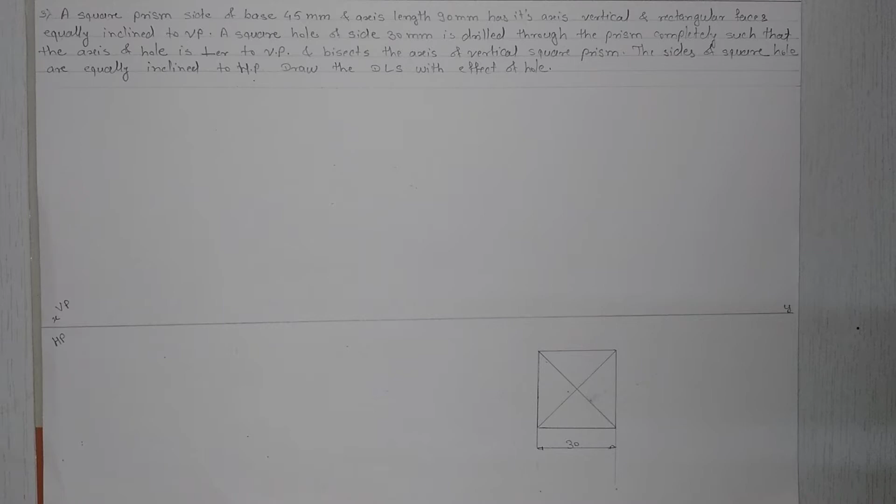Hello student, in our video lecture series of mechanical working drawing, we take the fifth problem. First we read the problem carefully.

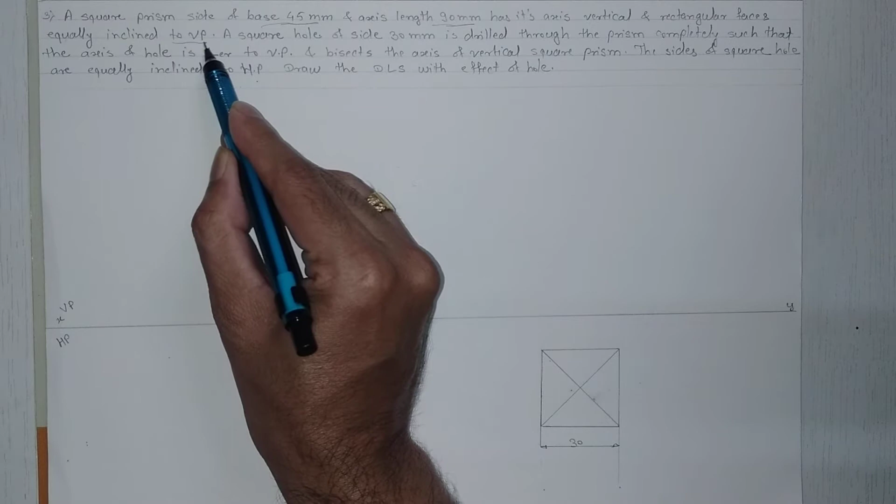A square prism, side of base 45 mm and axis length 90 mm, has its axis vertical and rectangular faces equally inclined to VP. Means rectangular faces are equally inclined to VP. Okay, means our square will be below the XY line, on HP.

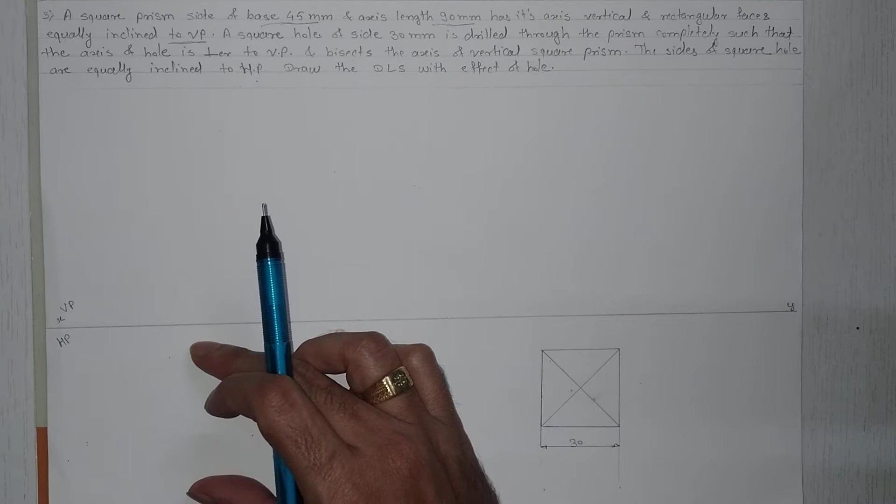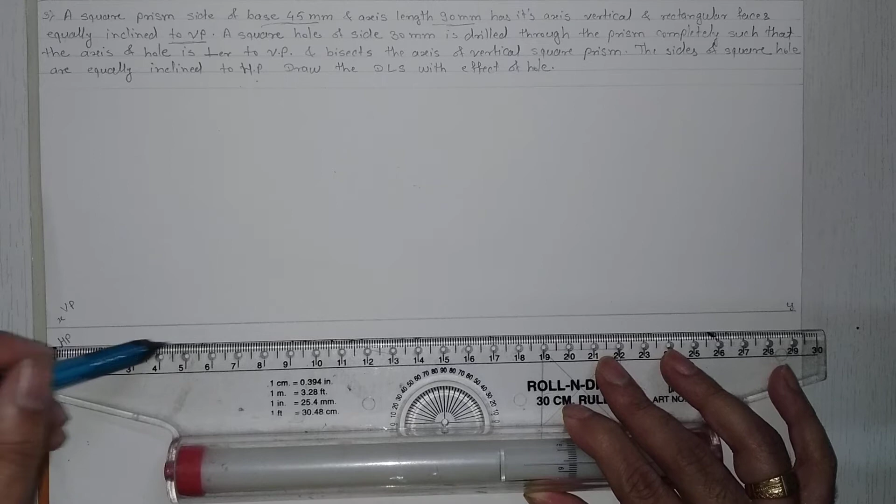Okay, first we draw the square below the XY line. First take a small horizontal line which will be parallel to the XY line. On that line we take an angle of 45 degrees in both directions. Sorry, this is 45. Then draw the angle.

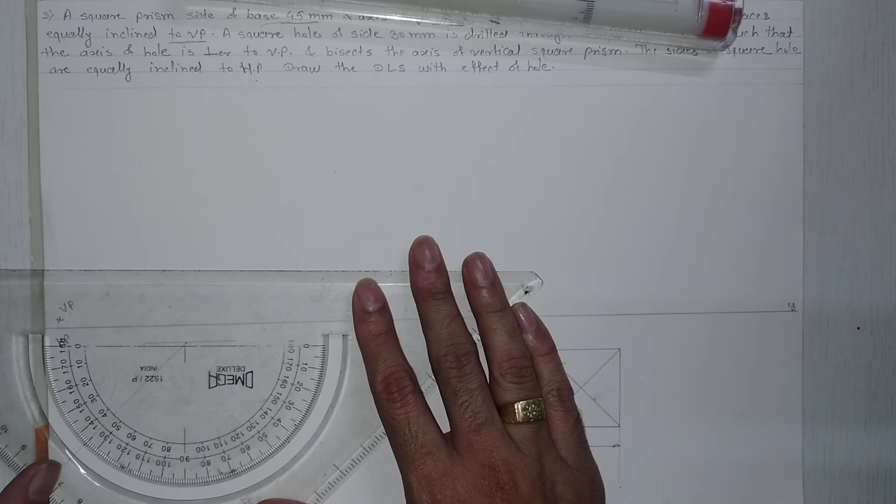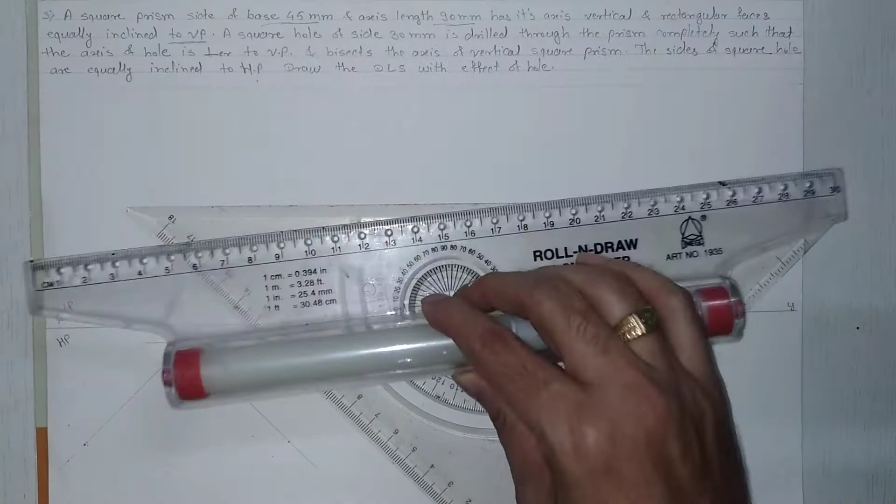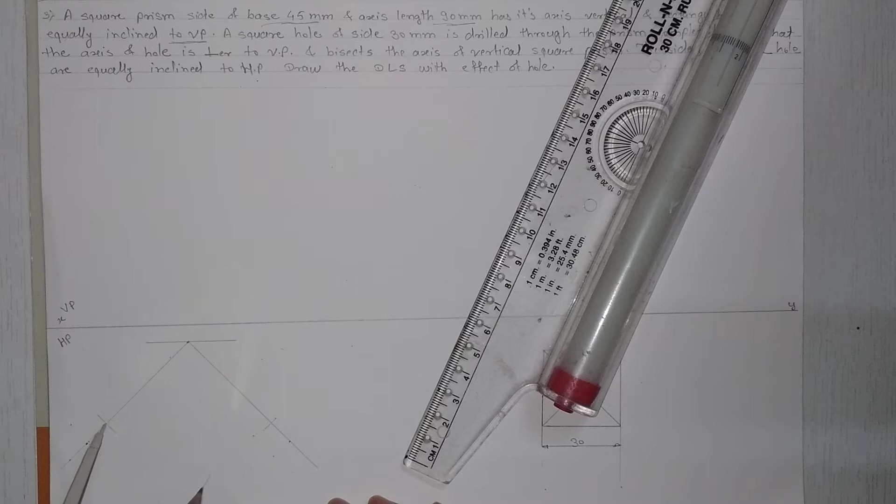Square prism, side of base 45. In the compass we take a distance of 45. This is the distance of 45 mm. After that, from this point we draw one arc on the 45 degree angle and the next arc on the other 45 degree angle. From that point we add two arcs and mark the point. Okay, here is our square, side of base 45 mm.

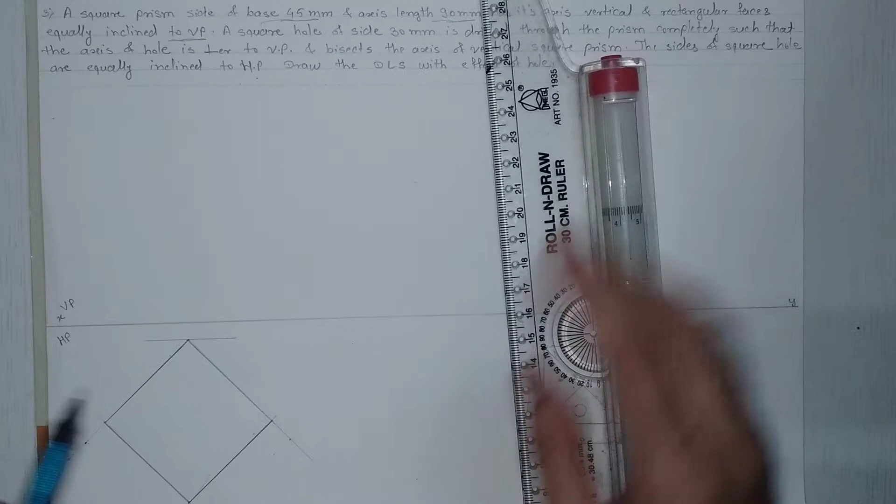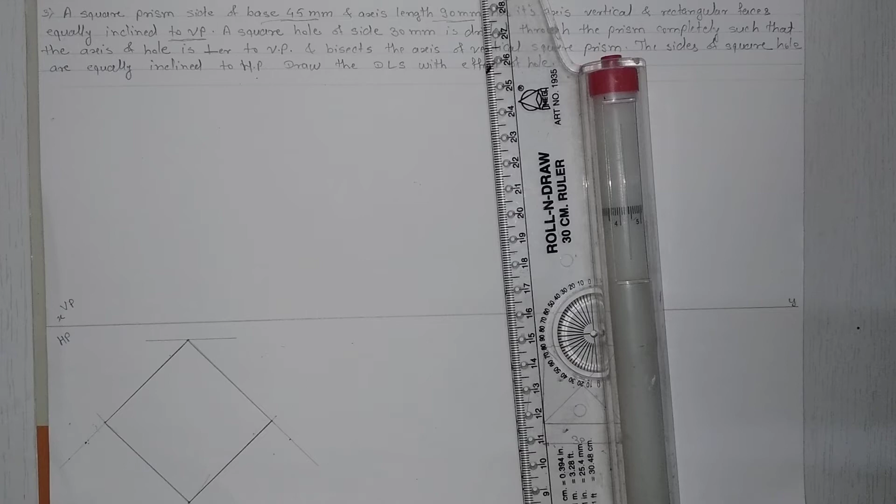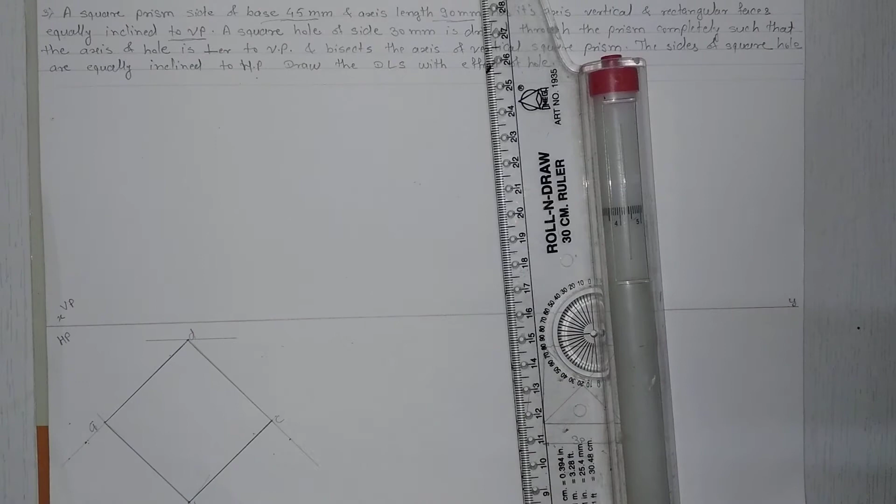Okay, we give the naming A, B, C and D. Take a vertical distance from this point for axis height; this is our vertical distance. The axis length is 90 mm. From this point we draw the line or mark the point at 90 mm.

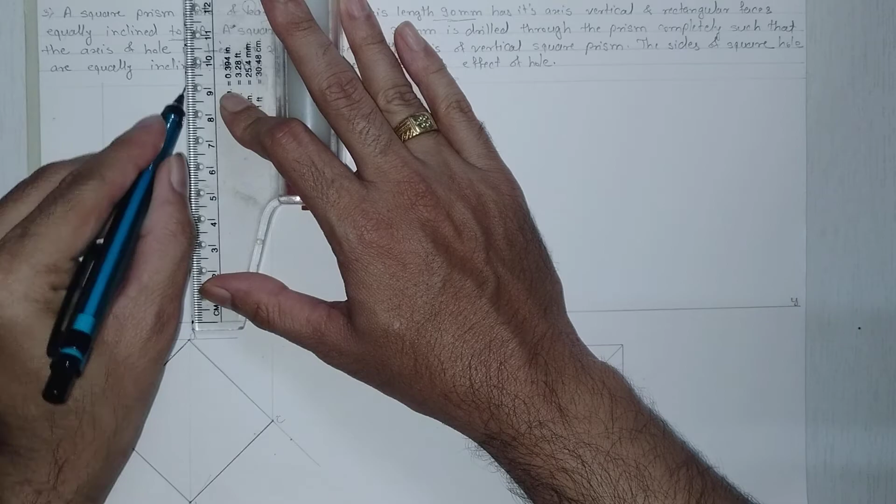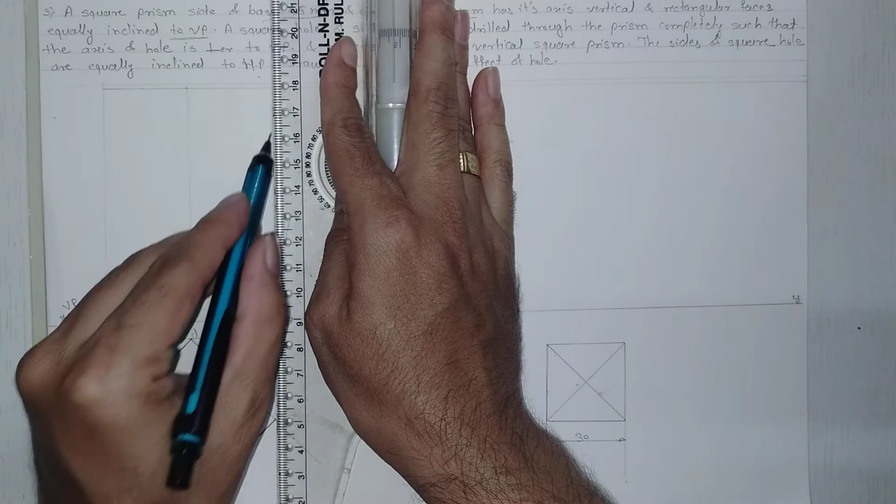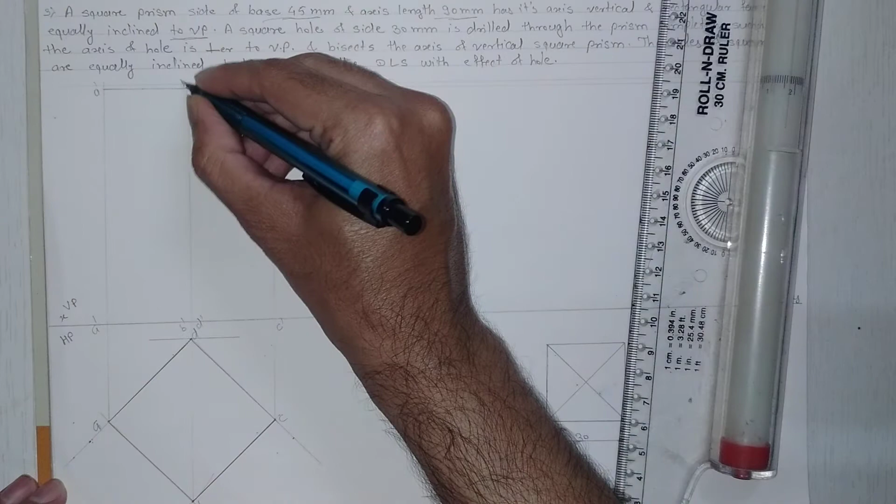Again, parallel to the XY line we draw a line at 90 mm axis length. Okay, A dash, B dash, C dash, D dash. Again here is A dash, B dash, D dash and C dash.

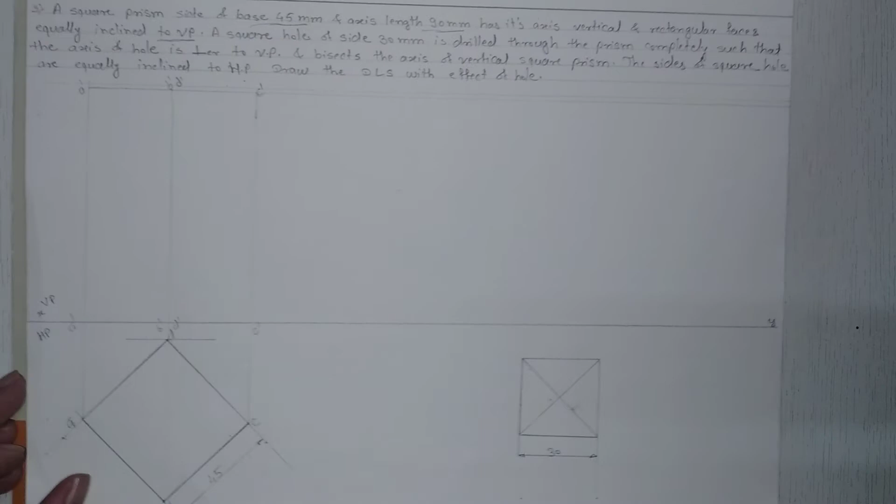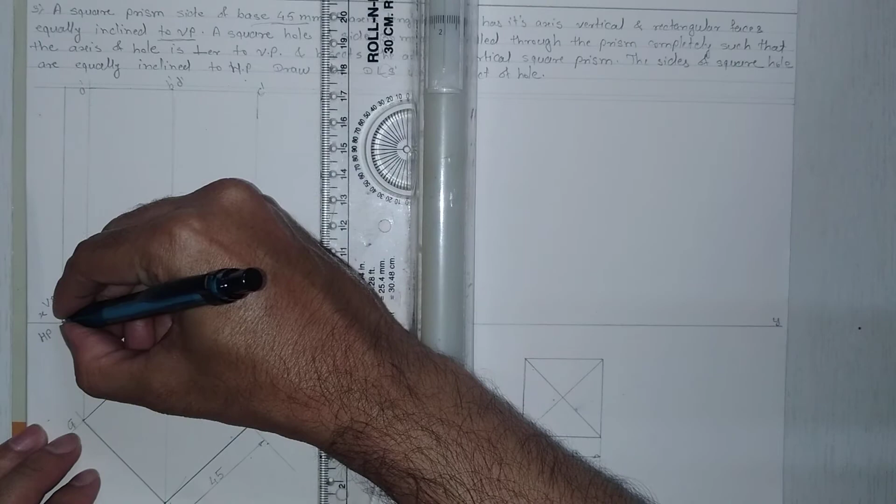Okay, now dimensions. The side of base is 45 mm, hence here is 45 mm. And axis length 90 mm. Here the distance of axis length is 90 mm.

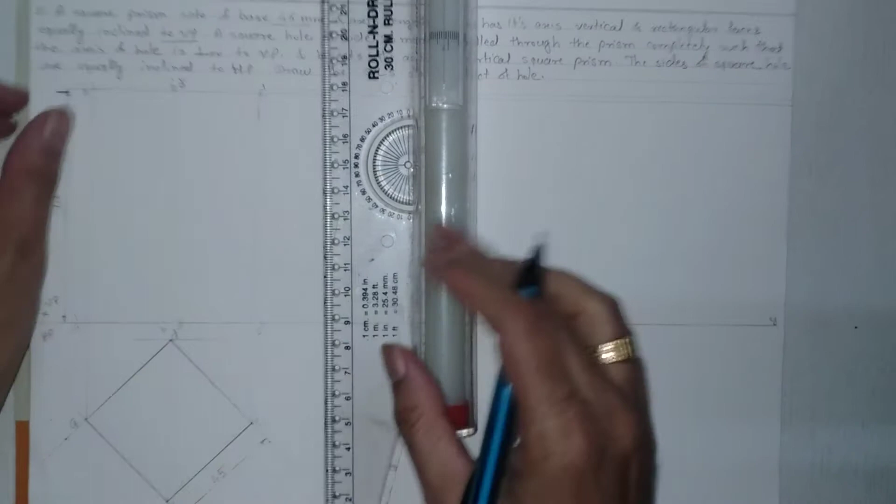After completion of this figure, we read the problem again. A square hole of side 30 mm is drilled through the prism completely such that the axis of the hole is perpendicular to VP and bisects the axis of the vertical square prism. Means we draw a square over here.

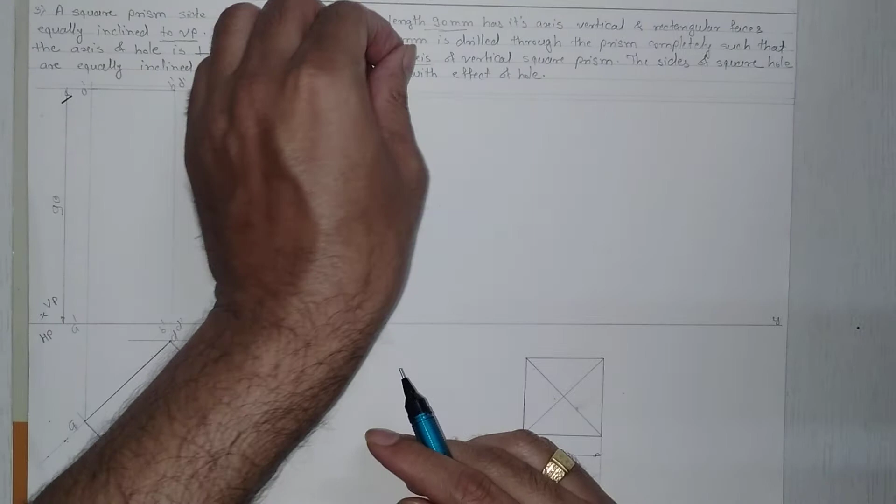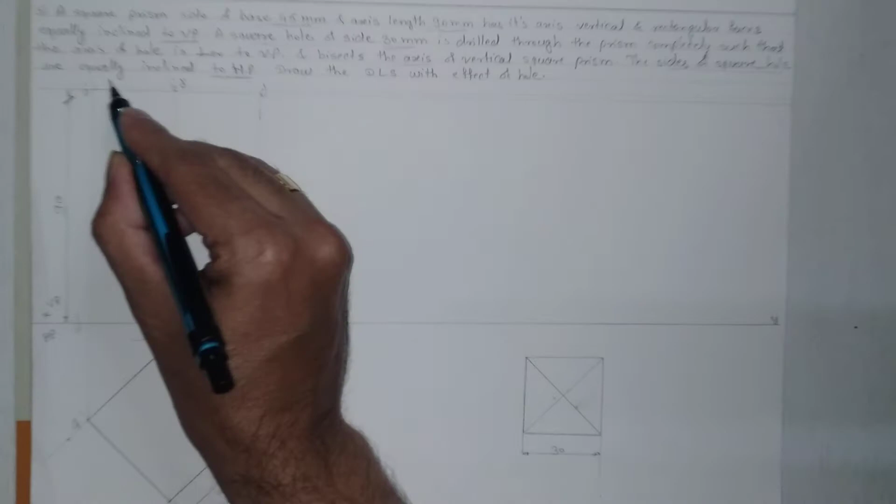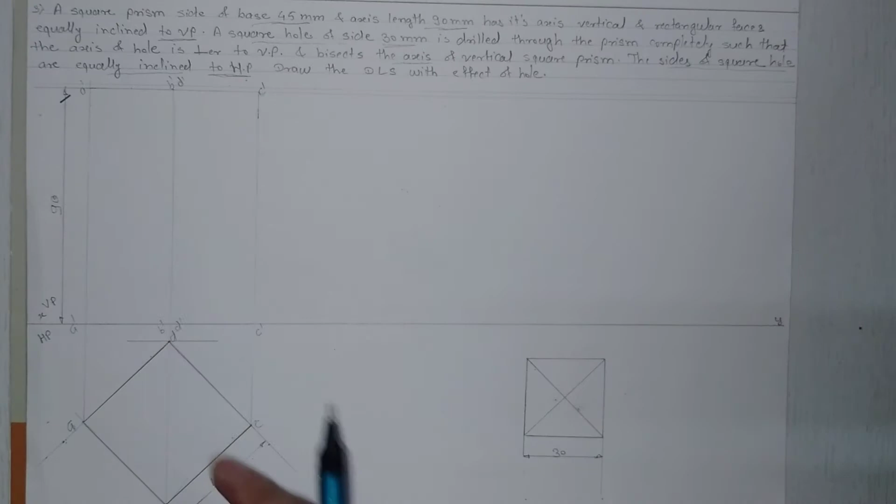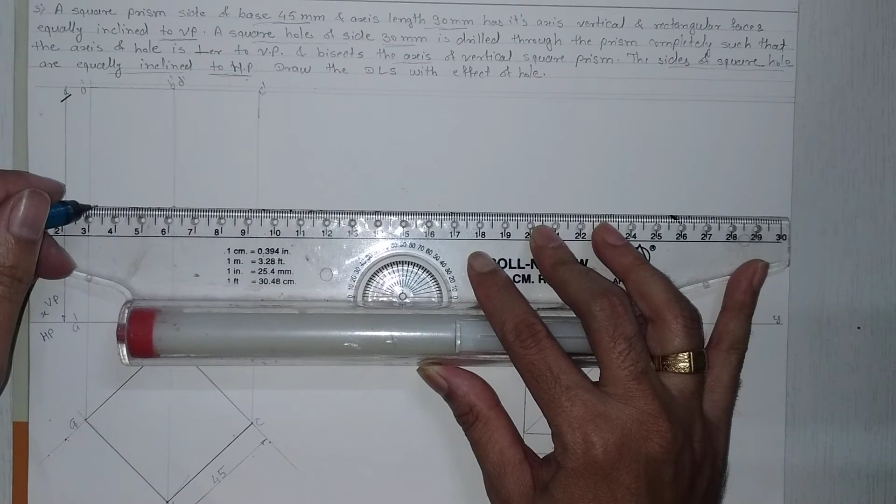The sides of the square hole are equally inclined to HP. Means here we draw the square hole equally inclined to HP; the prism is equally inclined to VP. First we take the midpoint by bisecting the 90 mm axis at 45 mm, and on that point draw a line parallel to the XY line.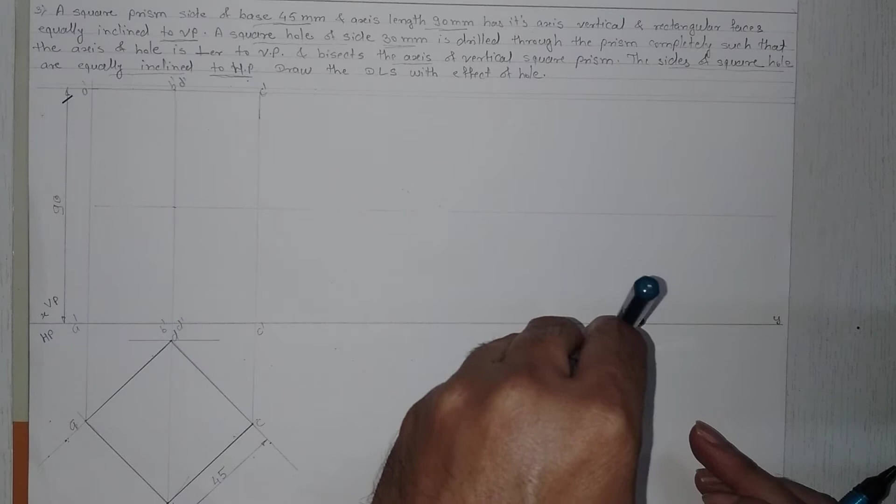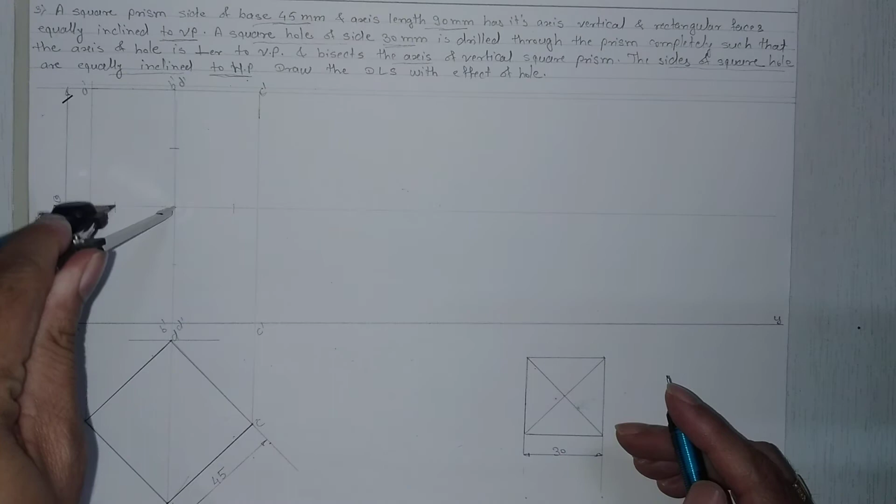The square hole side is 30 mm. Using this method we draw one square of 30 mm side and join the diagonals. From the midpoint of the square to one corner, we take that distance in the compass. This is the midpoint; mark the points on the vertical and horizontal axes, and draw the lines on that arc. This is our square hole of side 30 mm.

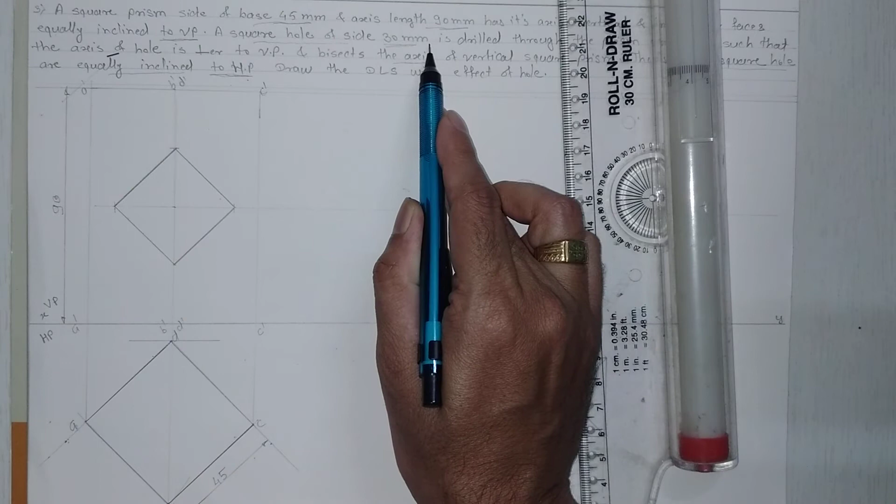The square hole of side 30 mm is drilled through the prism completely such that the axis of the hole is perpendicular to VP and bisects the axis of the vertical square prism. Bisect means this angle is bisected at 45 degrees. The sides of the square hole are equally inclined, at 45 degrees, to HP.

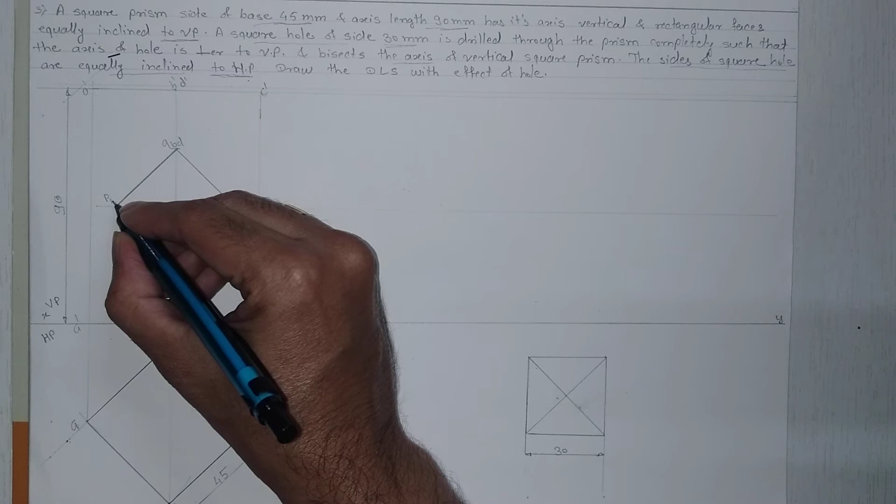Now we give the naming. B and D cut at this point, then P, B and D, and Q, B and D. But these points do not cut any line of the vertical square prism, hence we give other naming: P1 and 2, P3 and 4. These points we project onto the vertical square prism.

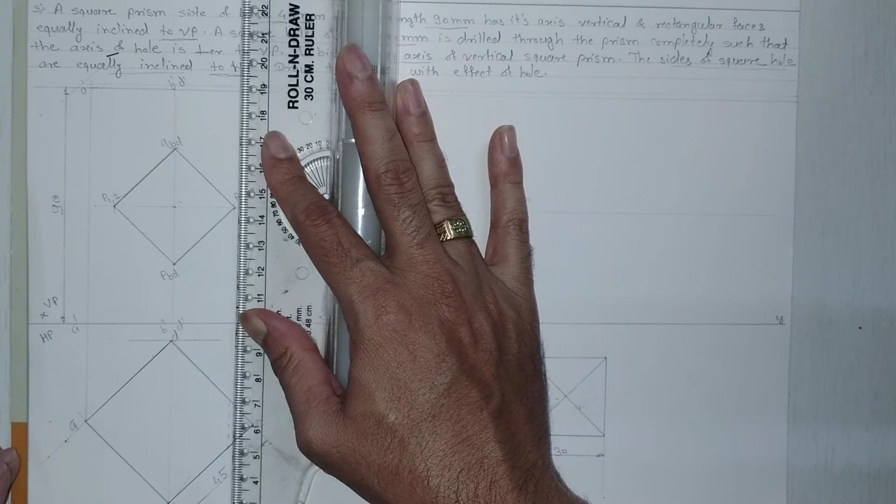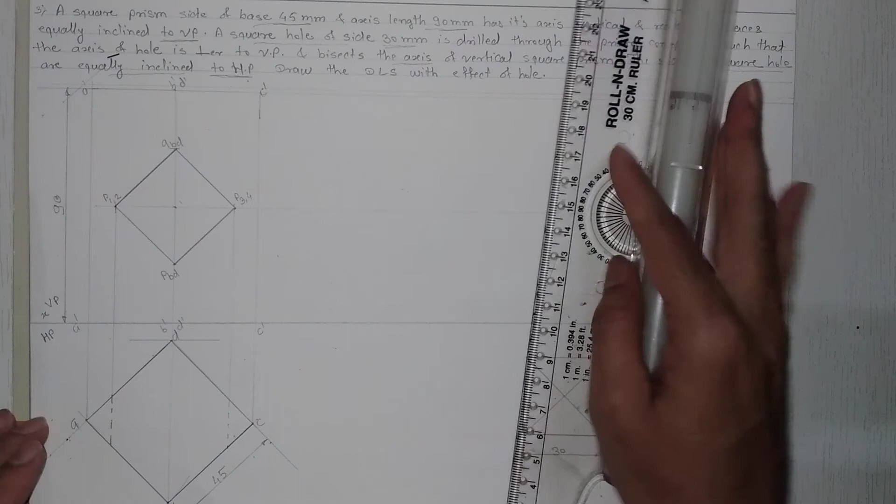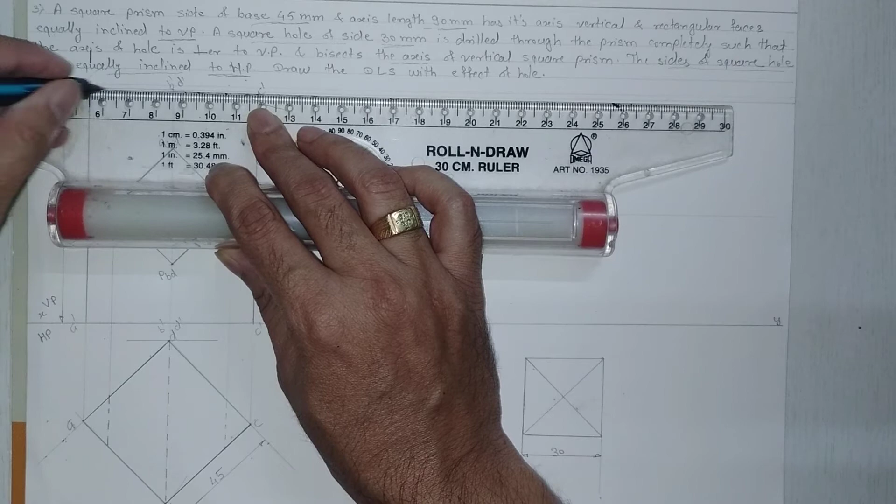Means over here is the dotted line, and again over here there is the dotted line. This is the square hole, so we mark the dotted lines here because these all are hidden edges. This is the drill in the vertical square prism. The remaining part we highlight by dark line.

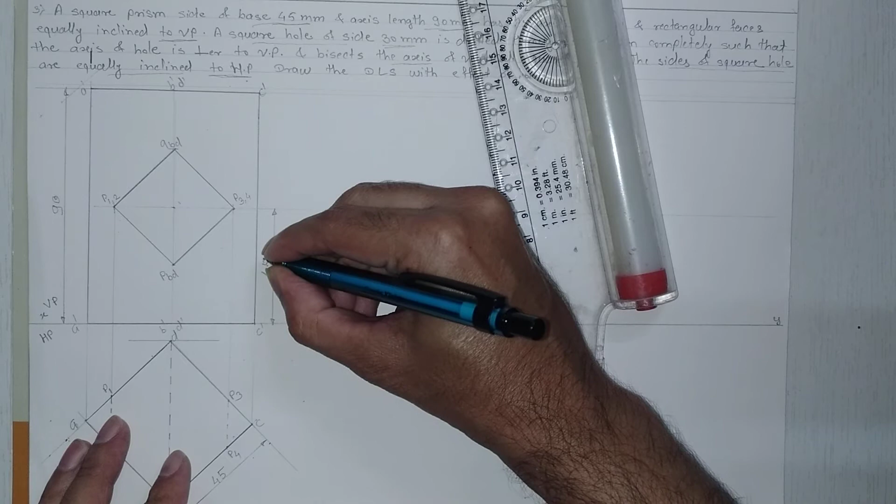Give the naming P12: here is P1 and here is P2. P34: here is P3 and here is P4. Dimensions: the hole is at the midpoint, bisecting the axis, hence this distance is 45, and the side of the square hole is 30 mm.

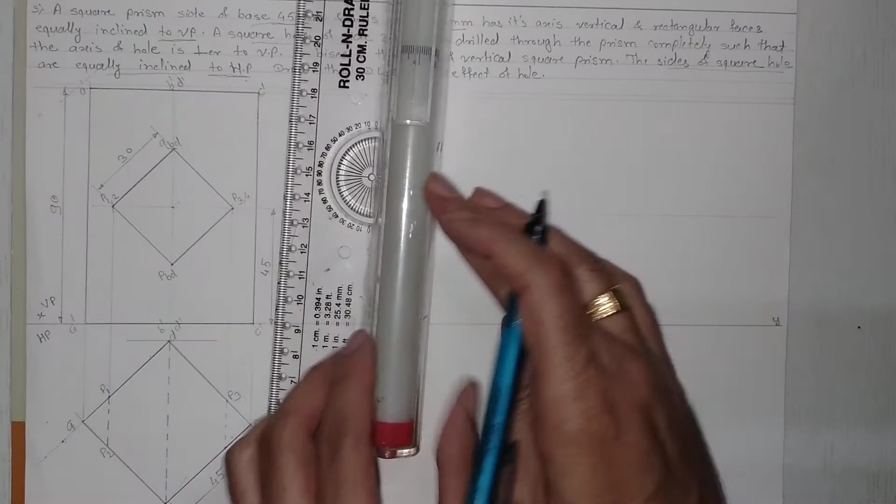So the side of the square hole is 30 mm. This is the dimension. Now we can develop the surface. First we draw one parallel line to the vertical axis here.

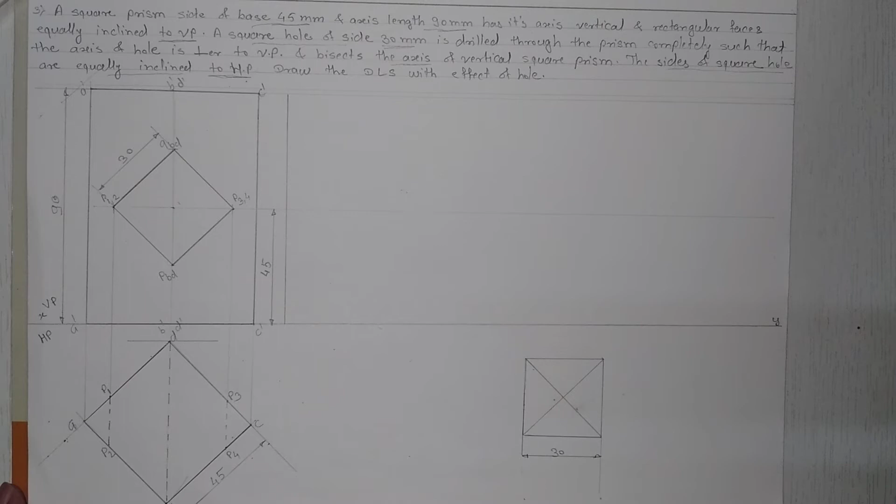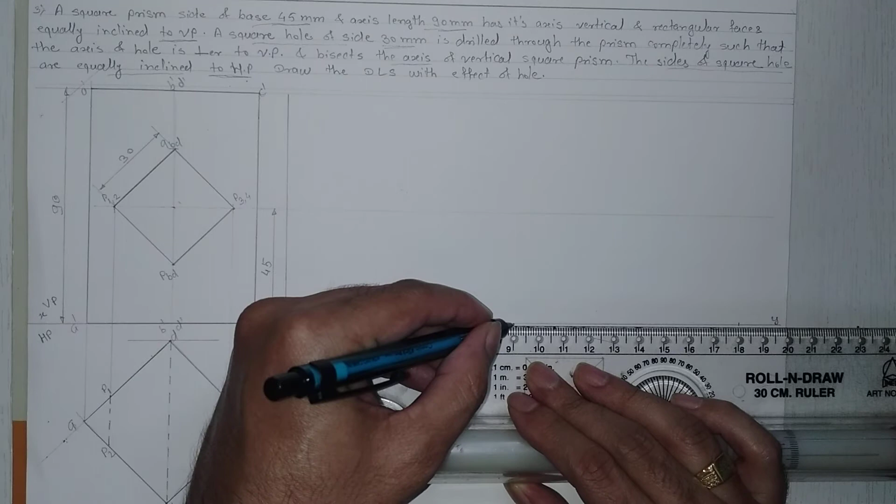Now the perimeter of the development surface is 4 sides. One side is 45, the next one is 45, the other one is 45 and 45. Hence the total distance for the perimeter is 180. Then from this point we take a distance of 180 mm. This is the 180 and the 45 point marks. These are the equal 4 parts of 180 mm. Hence the perimeter of the development of the square surface, the total distance, is 180 mm.

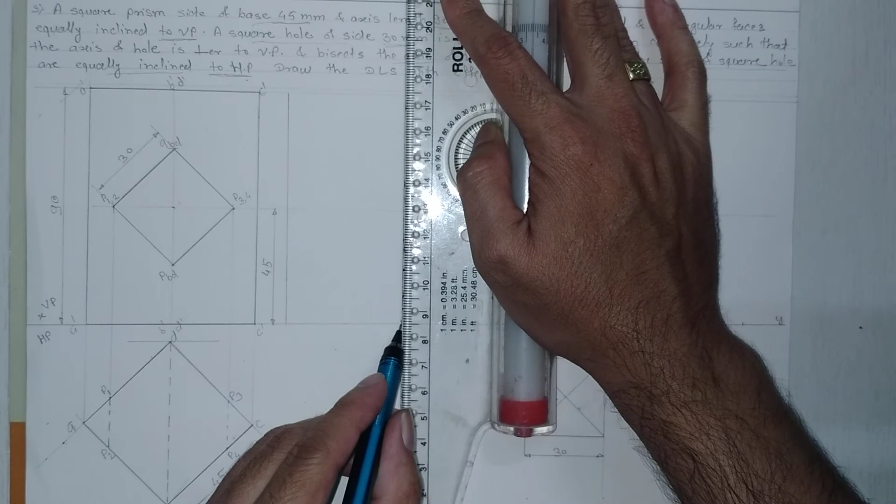Now we can draw vertical lines from those points. The first point is A, then B, C, D and again A. When we fold from B, C, D, we get a vertical square prism. This is the development surface of the vertical square prism: A, B, B, C, C, D and again A. Now this is the square hole.

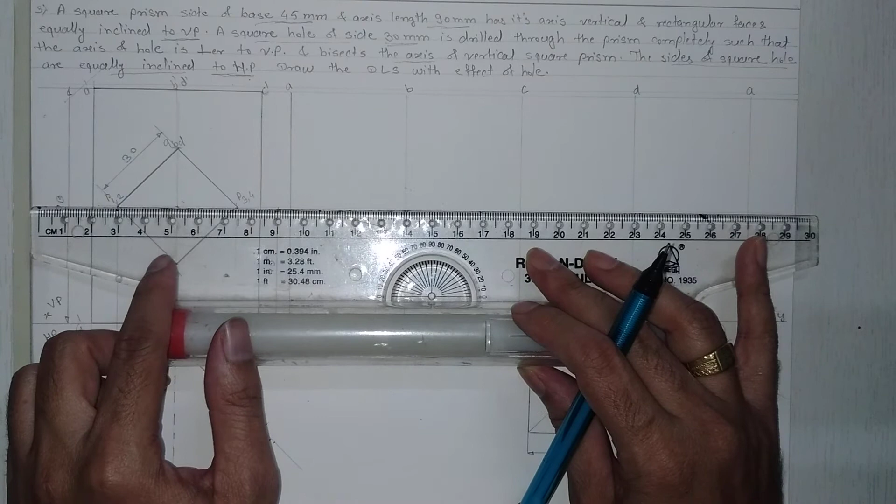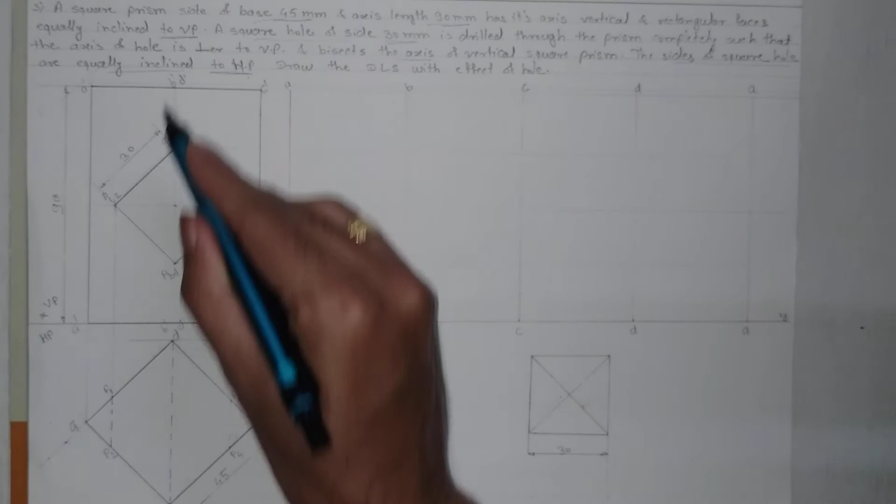We can take a projection of that square hole. This is the projection of the square hole. We just mark the points B and D first. PB is on the B dash line, hence here is the PB point. Again on that point PD also, then we project PD over here. Then QD or QB: here is QB and here is QD.

For the points P1, P2, P3, P4, we don't know exactly where to mark them. Just take a compass from point A to point P1 and take that distance in the compass. A to P1 in the top view and A to P2 is the same distance. From point A we mark over here. On the AB line is the projection of P2, hence this point is P2.

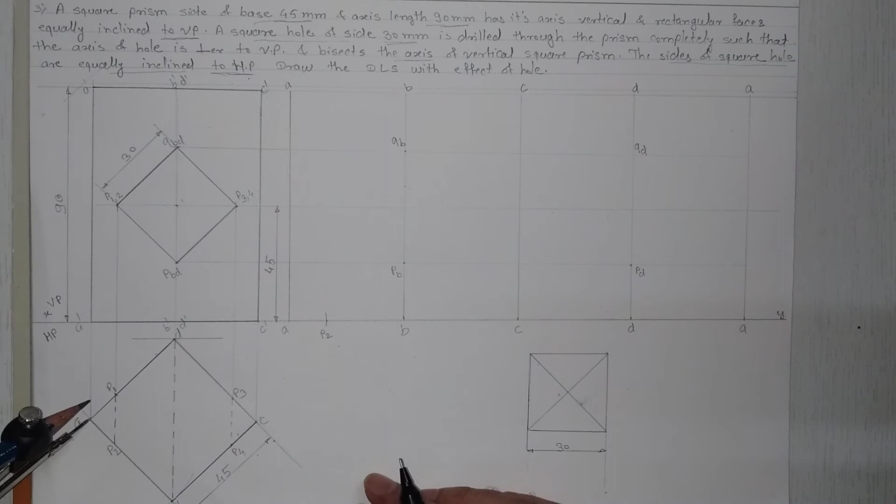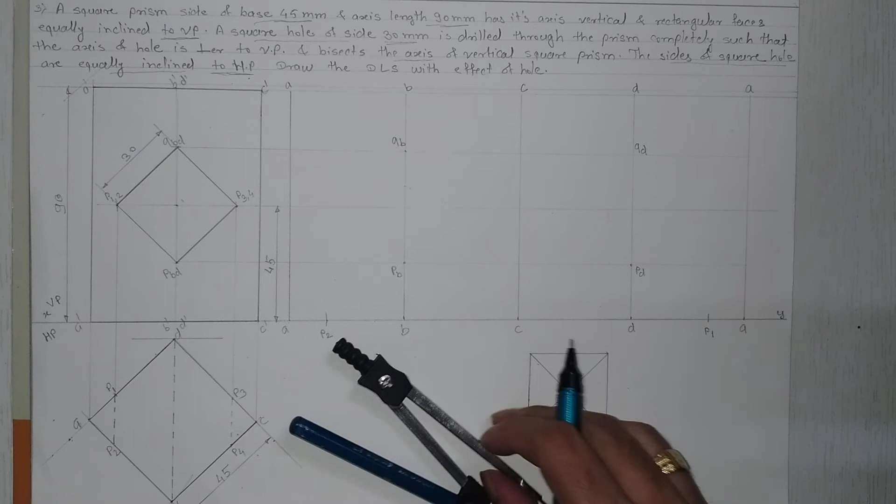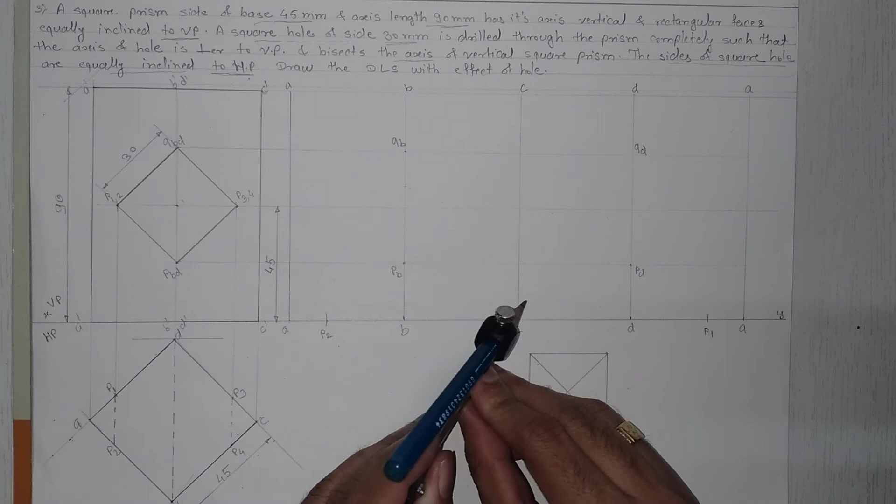A to P1, this distance is in the compass. This P1 is between A and D. Then over here we mark P1. Same for C to P3. C to P3, this P3 point is between C and D. Then from C and D, here is the point P3.

Same for C to P4, distance in the compass; this P4 point is between C and B. Hence from point C we mark the distance on the BC line. Here is P4. If you take a distance from point C, you mark from point C. If you take a distance from point D, then you draw from point D. But we are taking distances from points A and C, hence we mark A to P1 and P2, and C to P3 and P4. If you take a distance from B or D, then you mark from that point.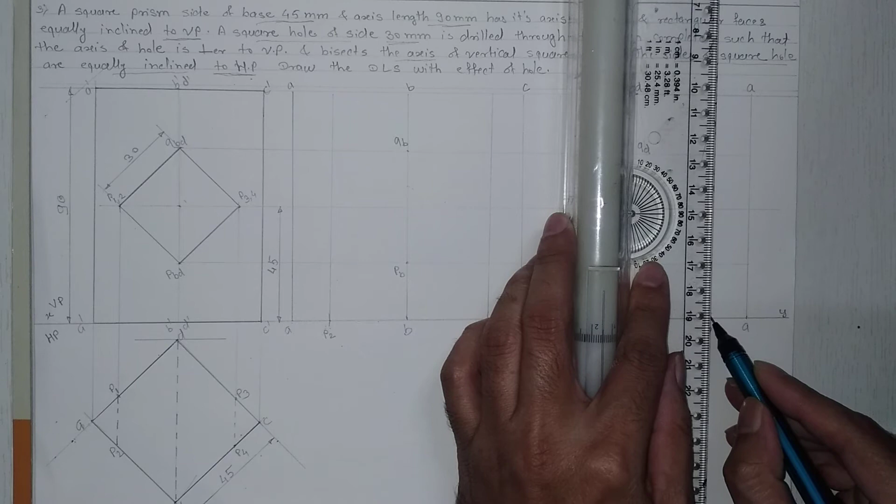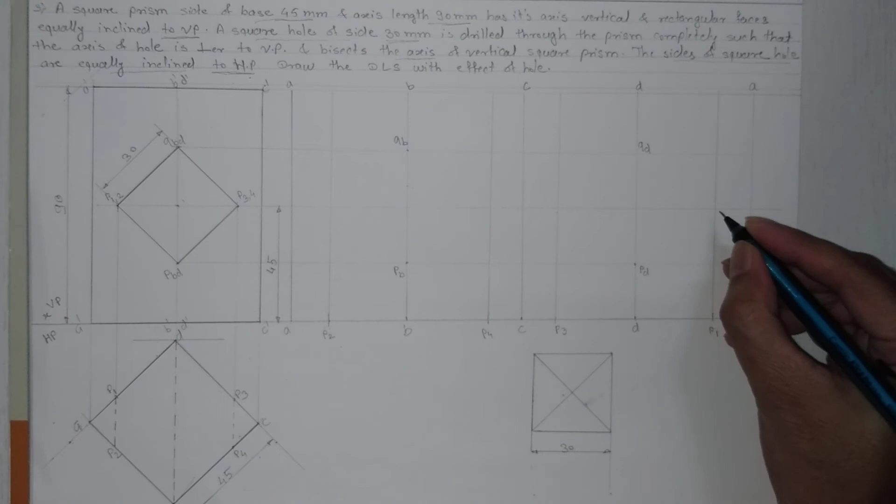Now from the points P1, P2, P3, P4 we draw vertical lines. This is simple. Draw the line. Just mark P1 on the P1 line. Here is the P1 line, so this is the P1 point. P2, here is P2. P3, here is P3, and P4, here is the P4 point.

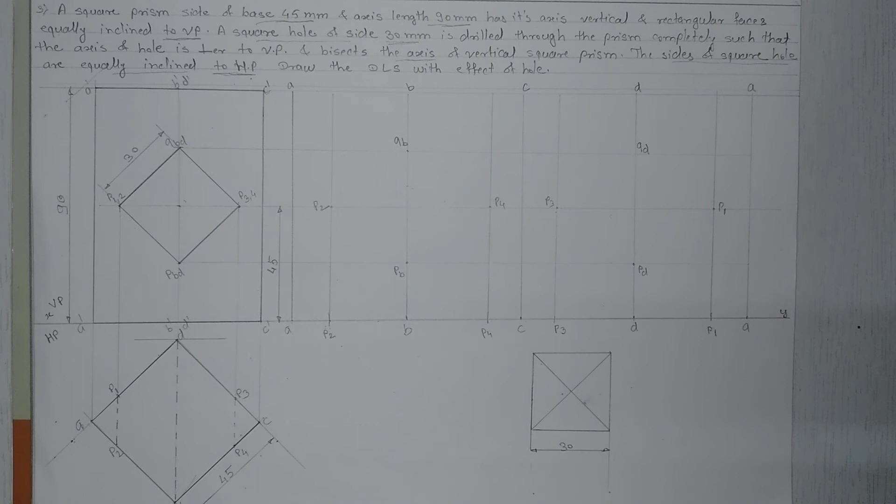Now P1 to PB and QB, P1 to PD, sorry, P1 to the D point means the PD point. Here is one line, P1 to PD. Again P2 to PB, hence P2 to PB and QB.

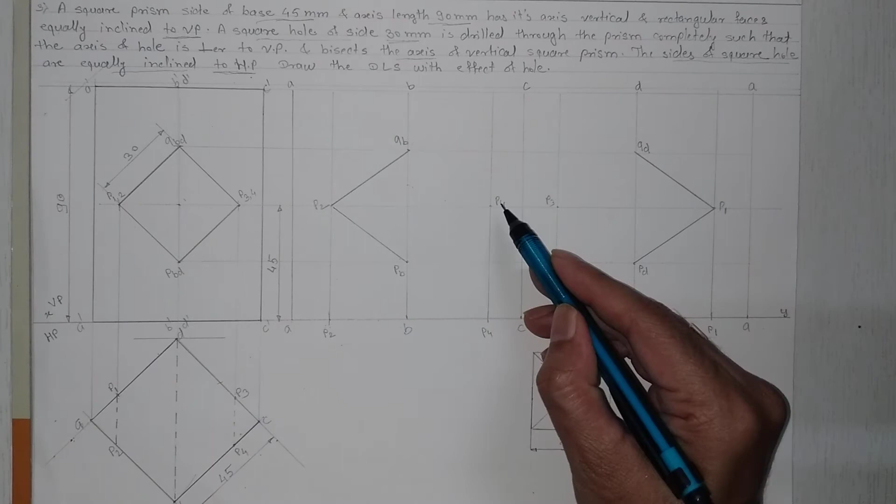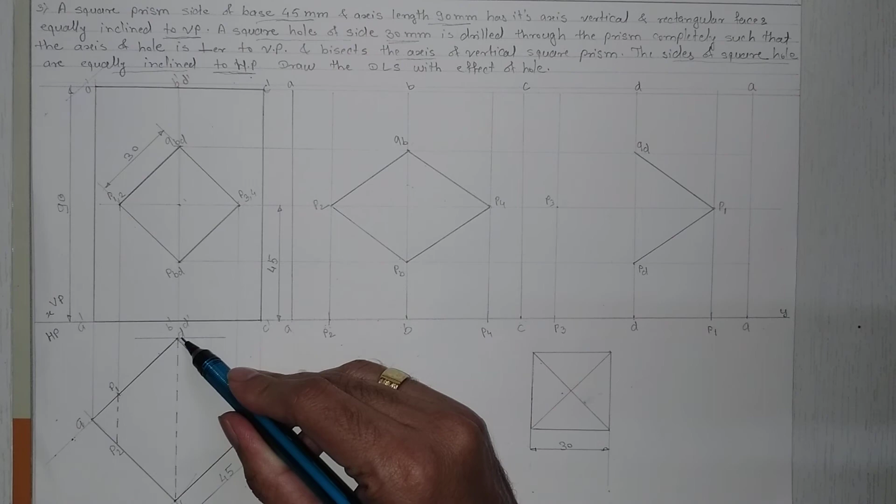P1 to QD. And last, B to P4, meaning PB to P4 and QB to P4. And the last one is P3 to the D point: P3 to QD and P3 to PD.

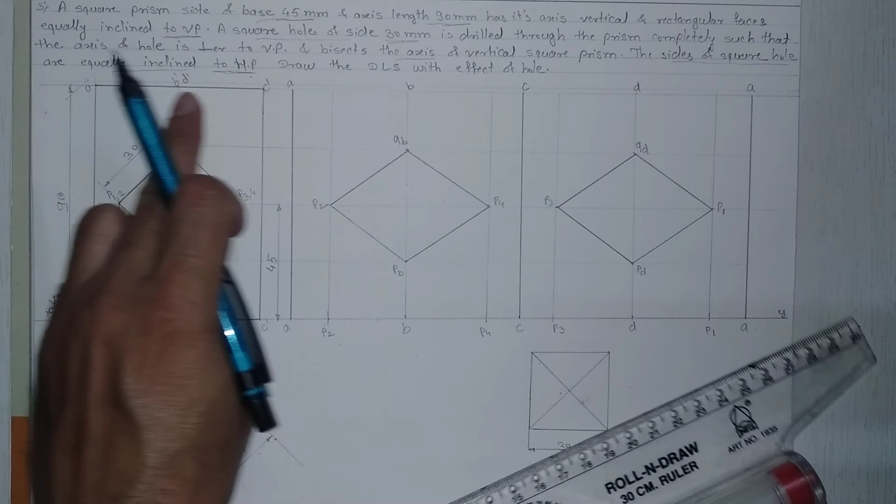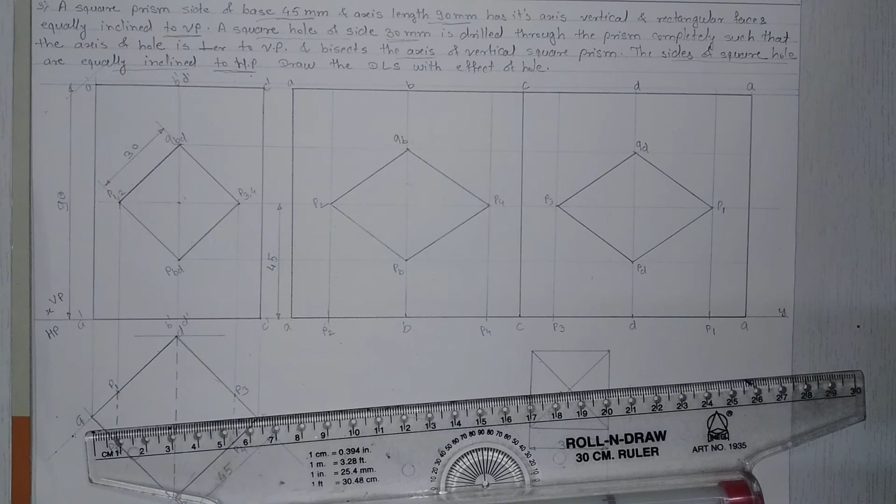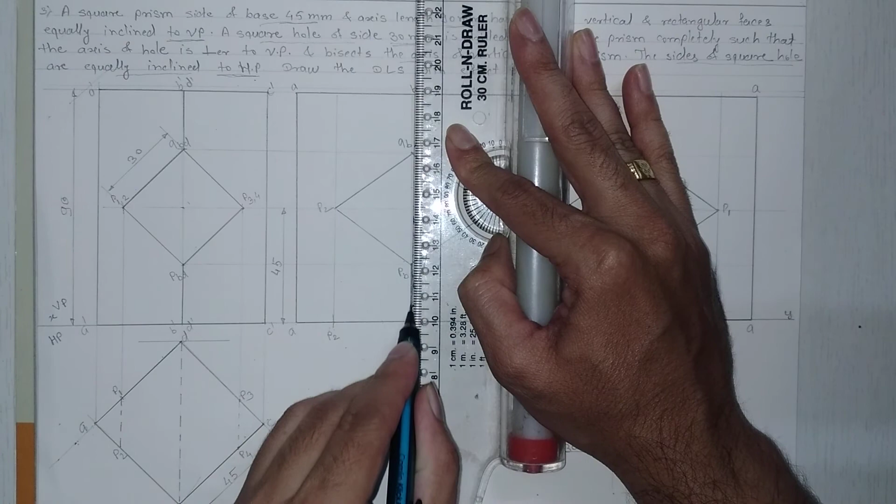Now the remaining part will be dark. The A dash line is dark. C to C dash. A, B, C, D and again A, meaning the bottom line, is dark. This will be dark, and the remaining part of B dash to PB and QB is dark. Hence from this to this and from this point to this point is the dark line.

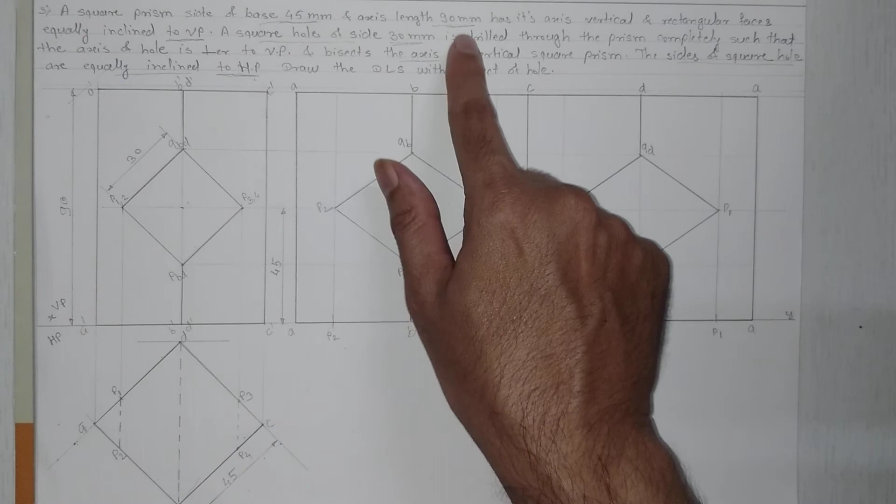This is our development surface of the square prism with side 45 mm, axis length 90 mm and a 30 mm square drill. If we fold along the B, C, D lines, we get exactly this view. This is our development surface. Just give the dimensions.

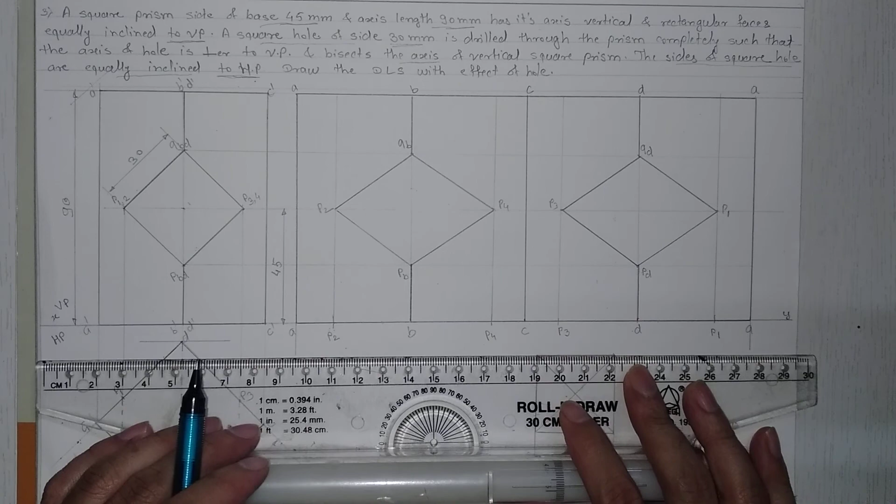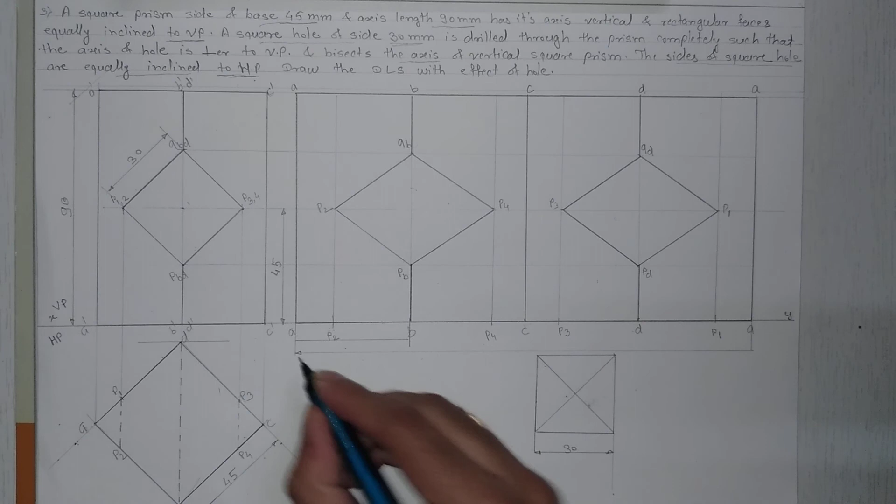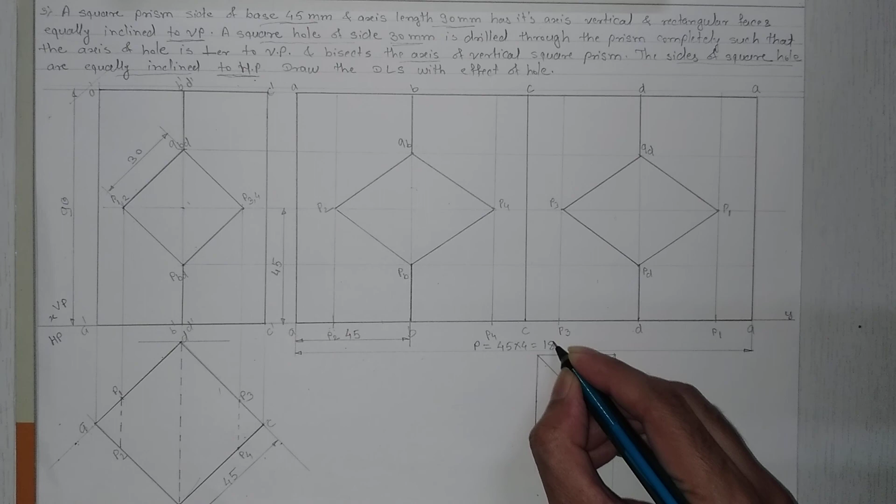This is one side. A to B is one side of the vertical square prism, that is 45 mm, and the perimeter of the development surface is from A to A. The perimeter is equal to 45 into 4, that is 180 mm. This is our development surface of the square prism with a square drill.